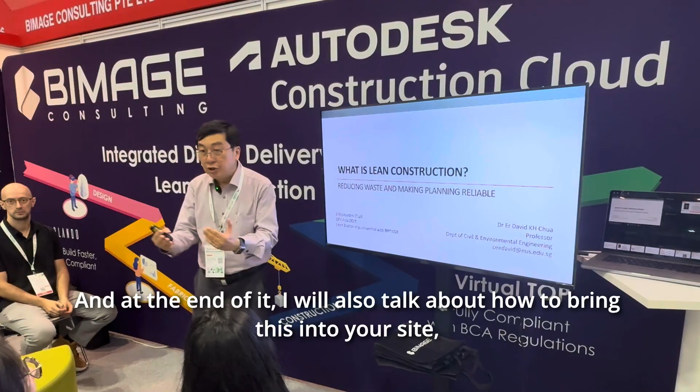Okay, now I'm going to talk to you about lean construction. And at the end of it, I'll also talk about how to bring this into your site, how to implement true lean construction. Okay, the idea is reducing waste and making your plan reliable.

Now, these are all my research. Actually, I've been doing lean construction, started in the 80s, came back in '89 for my PhD, and then did a sabbatical in '97, and since then I've been doing lean. That's when it was born in America, around that time. So I've been doing that, and this software was actually developed some years back. Then I worked on artificial intelligence and all. Lately, I'm working on construction automation. So later, if those are interested, we can talk about what construction automation we have done.

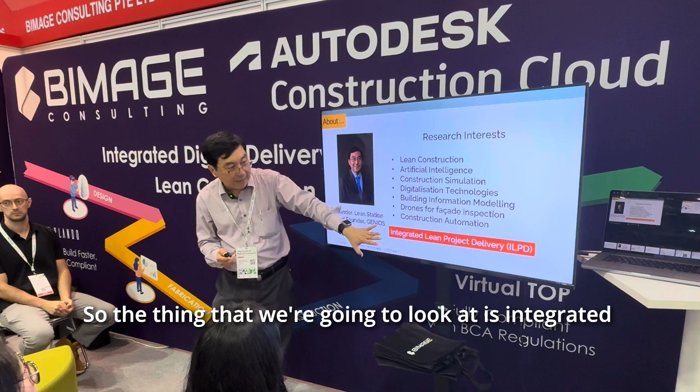Okay, so the thing we're going to look at is integrated lean project delivery. So now we're going to go through why go lean, then some lean methodology, and then we're going to look at implementing lean in projects. Okay, and looking at an overview of Lean PlanDo, that's the software that we have, and managing this change, managing the change in the company to adopt this new mindset.

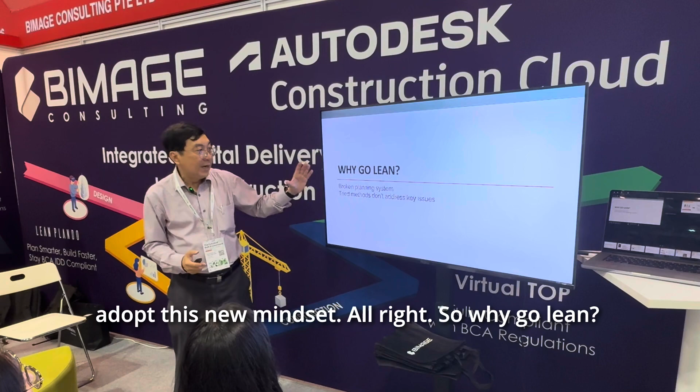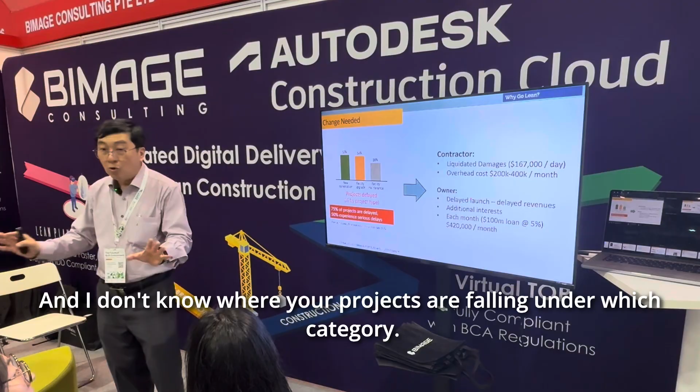All right, so why go lean? One of the things is that we know projects are typically delayed. And if you look at the data, 75% of projects are delayed. 50% experience serious delays. I don't know where your projects fall under which category, but typically this is the situation.

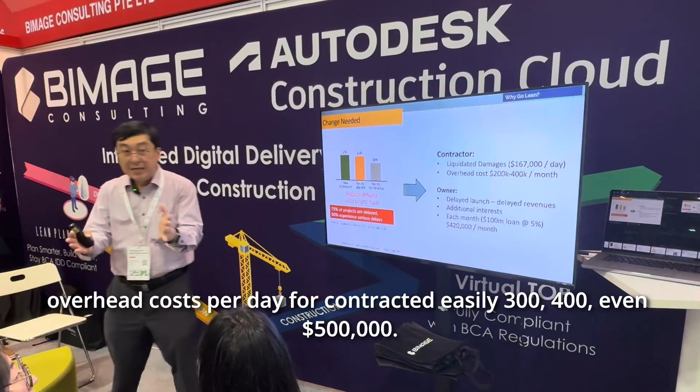And I want to just say that LD is pretty high. I've handled one which is $167,000 a day. So in the end, actually they would have gotten the building free if they had negotiated, but they settled with an outcome. Then the overhead costs per month for a contractor are easily $300,000, $400,000, even $500,000. So now if you have a methodology that can pull back a month or two months even, you're going to save $1 million easily. So this is where I'm proposing the value to you all.

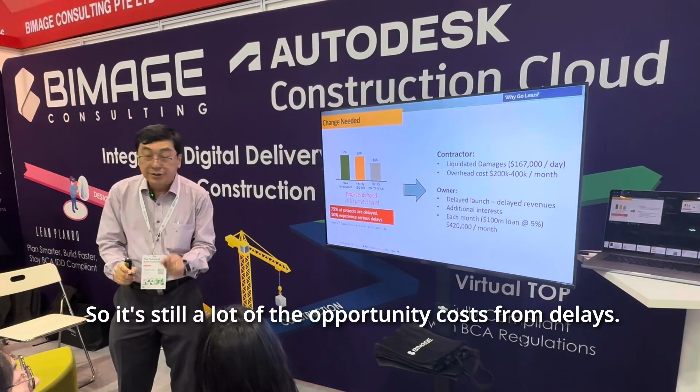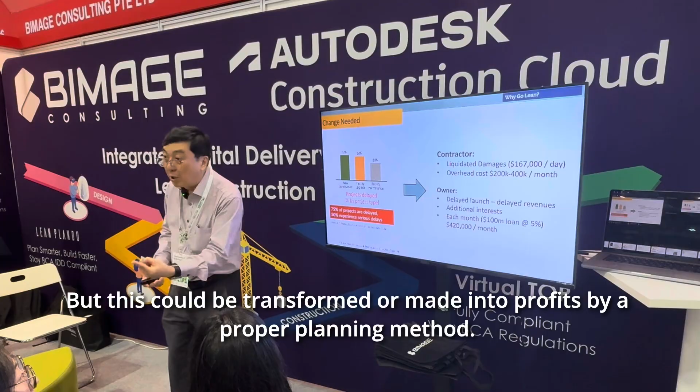The other thing is that even from the owner's side, each month, if it's a $100 million loan at 5%, it will be $420,000 a month if there's a delay. So it's still a lot of opportunity cost from delays. That's why a good, reliable planning method is important to bring back value to the project. So all the fat that you put in, you've actually budgeted it, but this could be transformed into profits by a proper planning method.

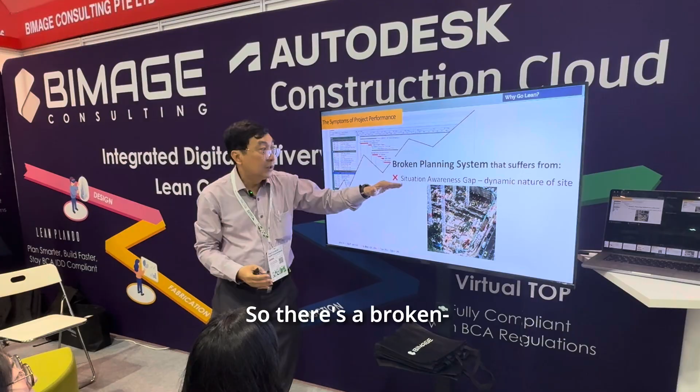So it's worthwhile to invest in a lean project delivery system. What we have actually is a broken planning system right now, the state of the art in the industry. What do I mean by that? First, it's a situation awareness gap. What is on the plan, on the site, on the chart, doesn't reflect what is actually on the ground. So this is a situation awareness gap because of the dynamic nature of the site.

So what we need is collaboration and visibility. And this is where we need a software, a system, a platform to be able to provide this collaboration of different stakeholders and visibility. Second is what I call a realism gap.

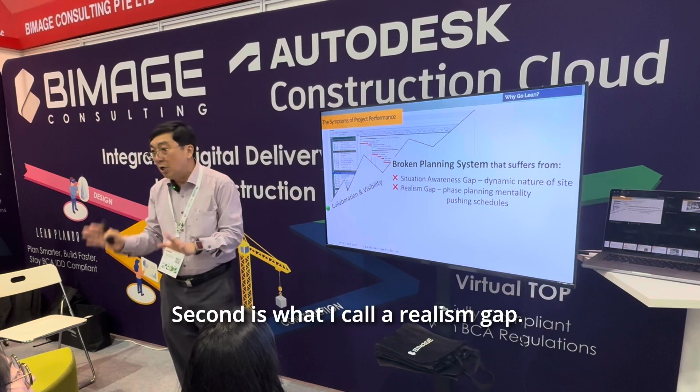There is what we call a phase planning mentality. We have a plan, we should do this, and we push this schedule. So we have a push schedule mentality.

So I'm going to show you a video. Lucille Ball, who knows Lucille Ball? This is Lucille Ball. You're too young. I'm 68, so those days I watched this. Okay, so anyway, watch this.

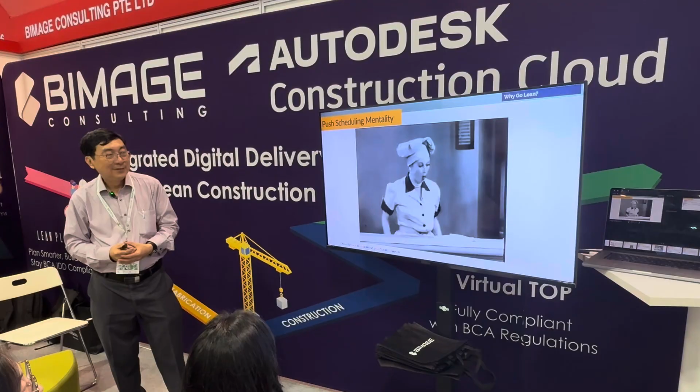I hope you all understand the idea. When we push a schedule, not knowing the capacity of the downstream, this is what we're going to get, a disarrayed schedule. Plans are all in disarray. And the other thing is that we don't have feedback. They cover all the tracks, okay? So push, you will get this.

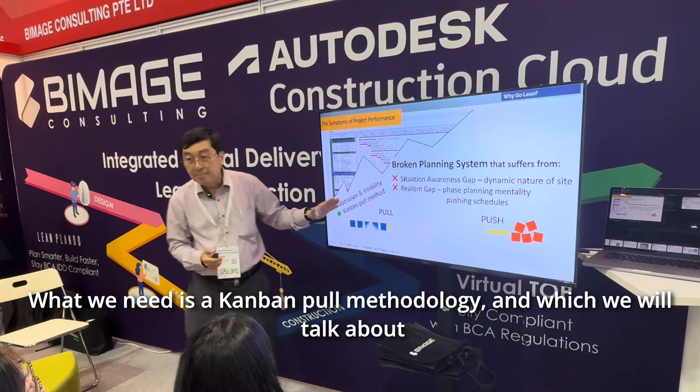What we need is a Kanban pull methodology, which we will talk about in the lean construction method. We have a pull mechanism that will bring about reliable planning for the site. The other one we have is bottlenecks. This bottleneck is because of flow variability.

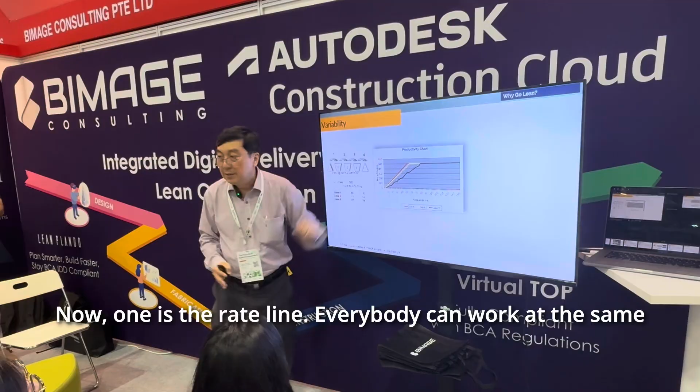Now, what do I mean by that? So I came up with this example. Just passing bins from buffer to buffer of different workers. Now, one is the rate line. Everybody can work at the same uniform rate all the time. This one has more variability, and this is the worst variability.

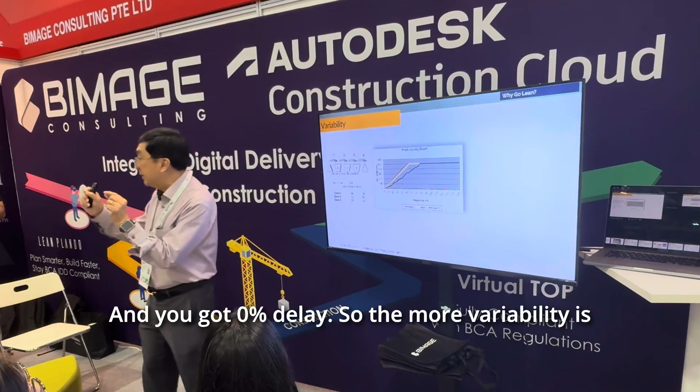So what will happen is that you can see that performance with the worst one is 54% delay, right? Without any variability, everybody moves smoothly like manufacturing, and you got 0% delay. So the more variability is in the system, the more the delays. And that's why your crane operation always has a bottleneck, because of variability in the demand for the supply. So that's a very important queuing problem mathematically.

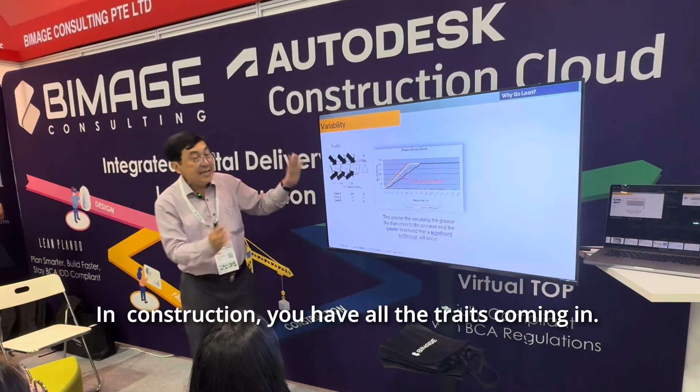So now, when this variability increases, you have a significant bottleneck. That was only one trade. In construction, you have all the trades coming in. Everyone has variability. This will grow and compound. So that's where the problem is. Can we bring in the idea, can we invest in reliable planning so that you have reliable, smooth production like a factory? This is where we want to go, all right?

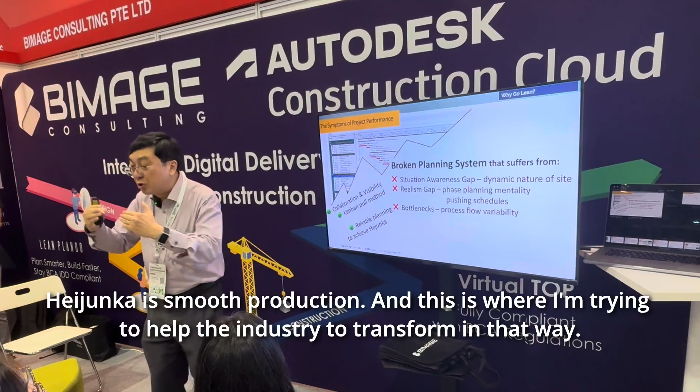So, with reliable planning, we can achieve Heijunka. Heijunka is smooth production. And this is where I'm trying to help the industry to transform in that way. Okay? What are these numbers? Just nice. These numbers are beautiful.

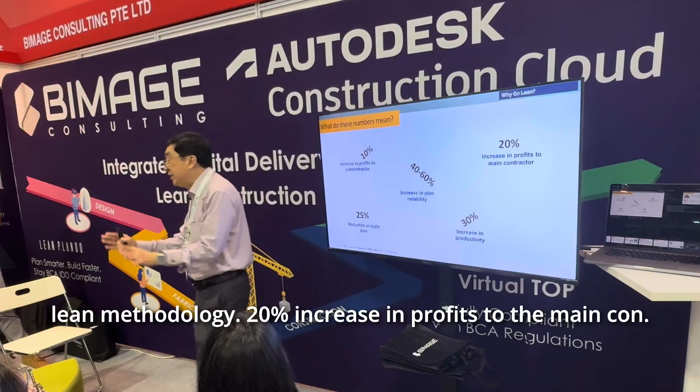10% increase in profits to your subcontractors if you adopt lean methodology. 20% increase in profits to the main con. We have 30% increase in productivity. We have 25% reduction in cycle time. We have increased plan reliability, 40 to 60%. Some of these numbers we experienced, some of these numbers are from research.

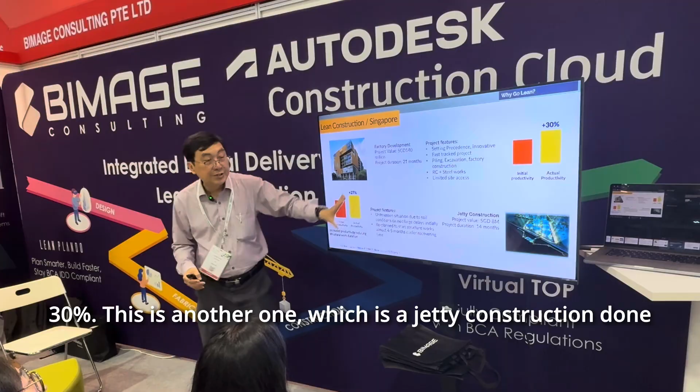Now, this is a project that we had. Actual productivity went up 30%. This is another one, which is a jetty construction done in the beginning years, 27% increase in actual productivity. So it is possible. What does the World Economic Forum say?

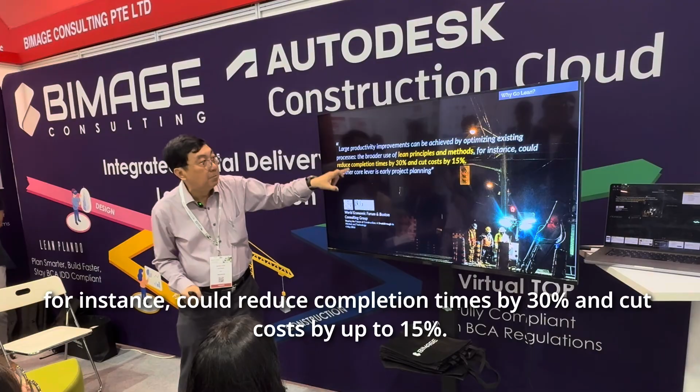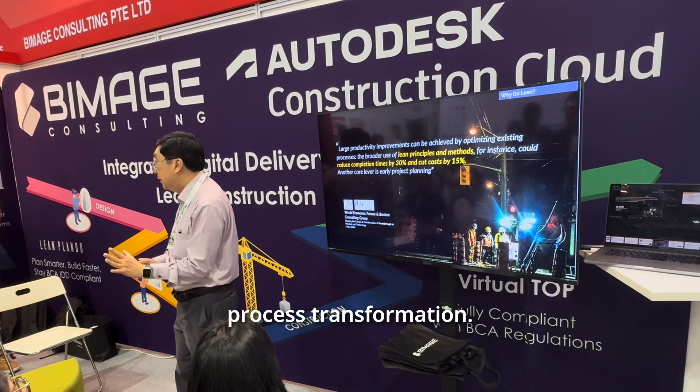And this is done by, if I'm not mistaken, BCG, and it says this: large productivity improvements can be achieved by optimizing existing processes, the broader use of lean principles and methods. For instance, could reduce completion times by 30% and cut costs by up to 15%. So we are looking at those types of numbers, a dramatic, radical improvement in project performance just by focusing on process transformation. All right? It is not technology, but process transformation.

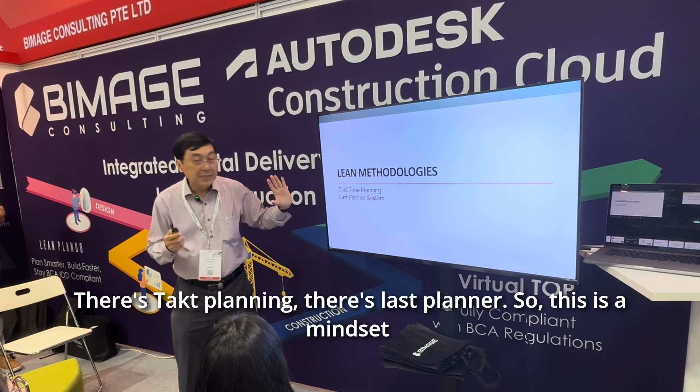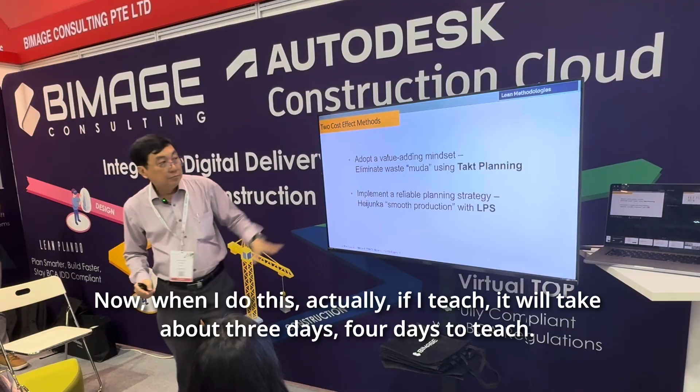So this is a mindset that will add value called takt planning, which I'm not going to focus on, all right? I want to focus on this other one, which is the last planner system, which will bring about what I call Heijunka, smooth production. Now, actually, if I teach this, it would take about 3 days, 4 days to teach. So I just want to go through this very quickly, the LPS system. How do we deliver that in our platform?

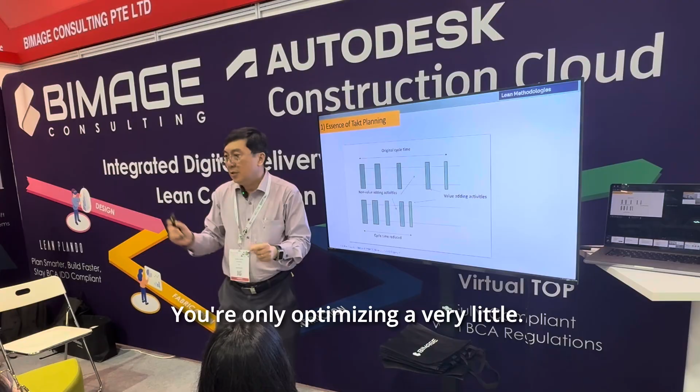So, okay, just an essence of takt planning. If these are what we call non-value adding, and these are value adding, the way to address the reduction of cycle time is not to focus on this. You're only optimizing a very little. But if we reduce the non-value add, you bring a lot of change in cycle time. I'll give you an example, lifting.

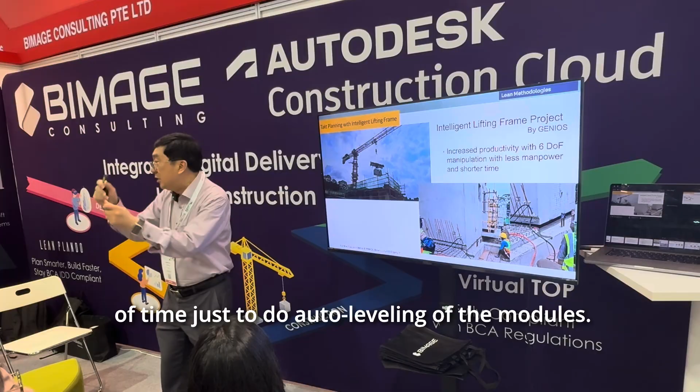I have a technology now called Intelligent Lifting Frame by Genios. Okay, I'm the CEO of Genios, and we can increase productivity because we have 6 degrees of freedom on that frame. It auto levels and so on. So just first cut, we save 20 minutes of time just on auto leveling of the modules, because we don't use chain block. We use technology, we got auto level.

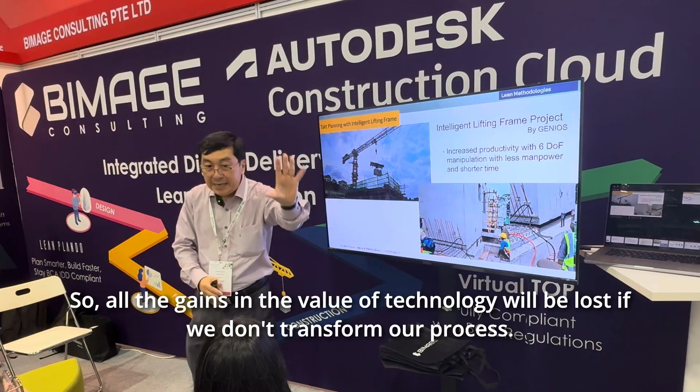With all these advances that we have, if we still have to wait for the arrival, we can waste 20 minutes, half an hour, just like that. So all the gains in the value of technology will be lost if we don't transform our process. So this is why takt planning is to be able to reduce these losses in waste. All right? Now, the essence of the last planner system.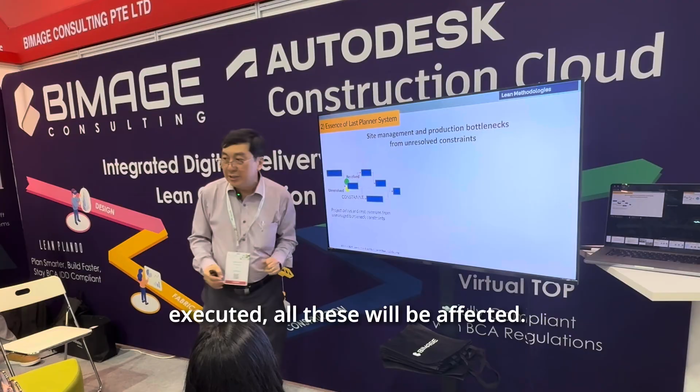If we have a schedule like this, and there are constraints, all right? If I show a green, it's resolved. If I show a yellow, it's unresolved. If this constraint is unresolved, this activity cannot be executed, and all these will be affected. And that's where you begin to have disarray in your schedule, in your plan. So the way to do it is manage the constraints.

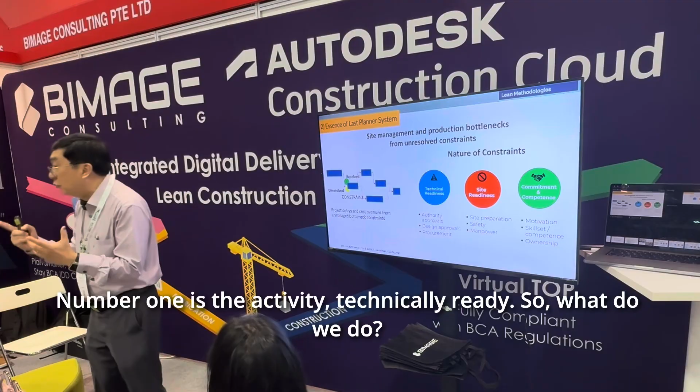So what we're going to do is, there are 3 types of things that we try to capture in our system to give you the underlying reason to your project performance. Number 1, is the activity technically ready? We have to track all the authority approvals, design approvals, procurement, and many others that talk about the technical readiness of your activity. Second, we talk about site readiness. And that's where we talk about safety, site preparation, manpower, and any other things that we want to monitor here.

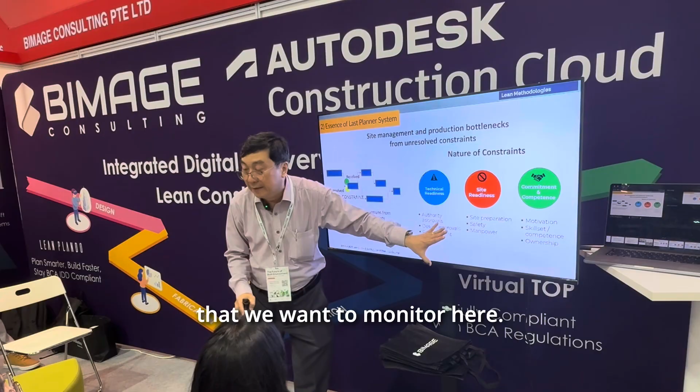Now, the last one is your motivation, commitment. That one can fall, because if you have this plan and they still can't perform, even though these 2 have been satisfied, because they lack commitment, that's where you will fall. So we have 3 ways of measuring what is happening on your site. And now, how does this fit into the whole planning system of LPS? So we need to resolve all this, all right?

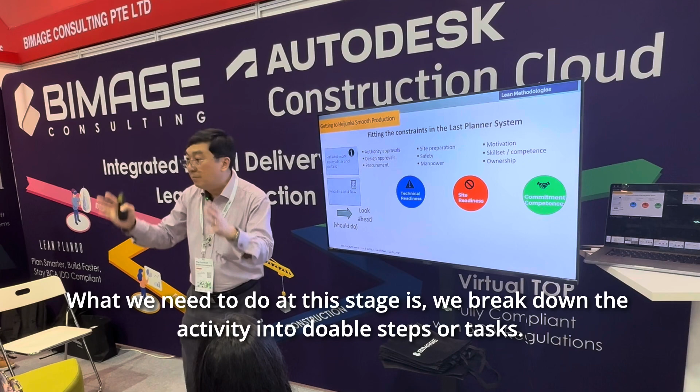So what we have is this, fitting the constraints in the Last Planner System. In our method and our platform, this is the look ahead. This is your original plan. What we need to do at this stage is we break down the activity into doable steps or tasks. Break down the activity so we can measure bite size. This is what we call should do. We should do this, but we have to make sure that it is technically ready. Then we will have what we call a shielded plan. This plan can be done, technically ready to do.

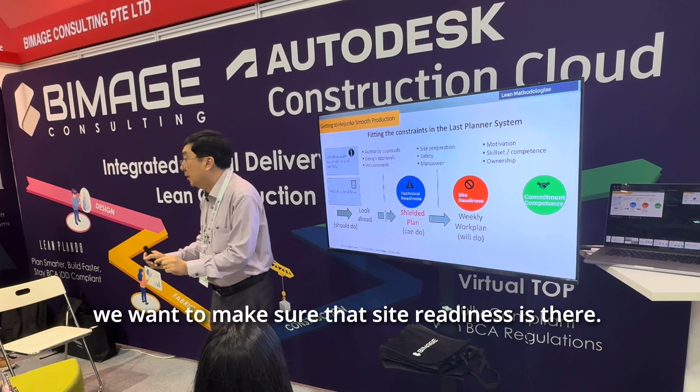Then we make sure in the next stage, before we let out the work, that site readiness is there. So once we have this, it means we will do this. Then this is given to the site, and this is then what we did. And the performance will go up if this commitment is in place. So what we do now, we want to measure. We get the data analytics to reveal. So we have a should do, and then we have a can do, remember? A will do, because everything is ready. And then finally, what is did?

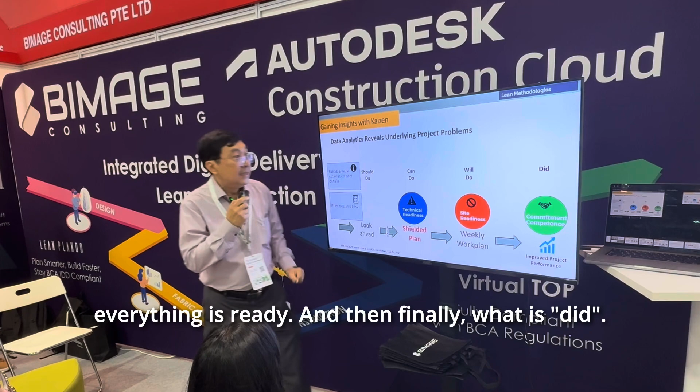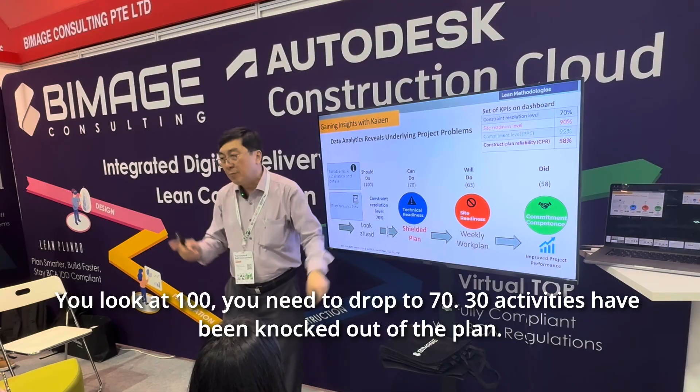Now, if we have 100 here, 70 here, 63 activities done here, 58 done here, we will be able to measure the KPIs of your site. And this is what we have, a constraint resolution level. You look, 100, you need to drop to 70. 30 activities have been knocked out of the plan because they have not been resolved. No one expedited, so they will be unresolved. So even though the site readiness, 63 divided by 70, is 90%, even though the commitment is 92%, the overall performance is only 58%. That's the point.

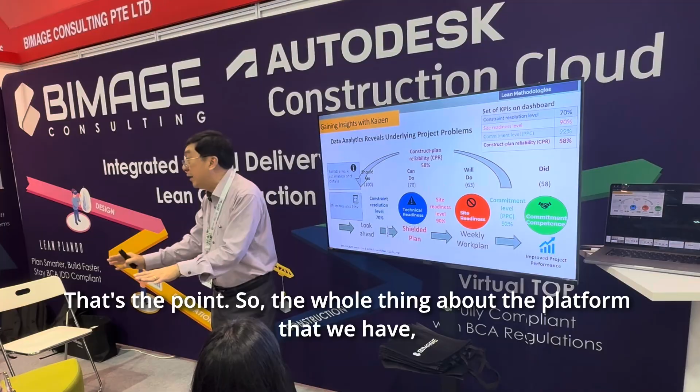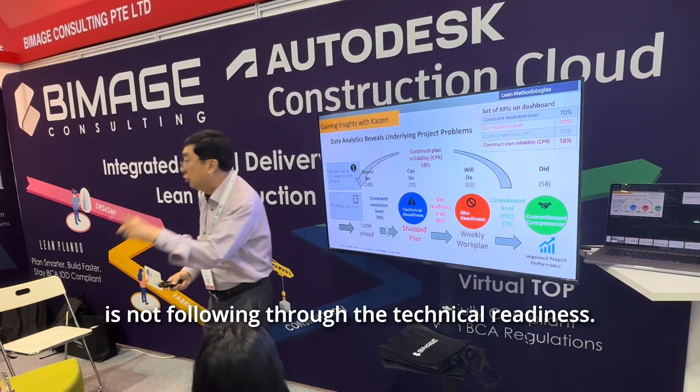So the whole thing about the platform that we have, we can measure where the site is falling behind. Looking at this now, there's no point trying to chase the commitment of the workers. They are there. Your subcon is ready. What is the problem? Technical readiness. It means somebody in your company is not following through the technical readiness. Approvals are not done. Right?

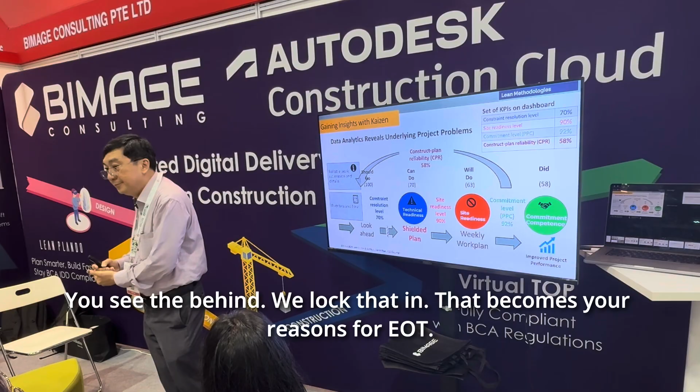So now what we have here is our system is able to pick up who is falling behind. We log that in every week. So if it's constraint readiness, what we do is this: consultant, you have not given us the approval. Because of this, you see the delay, we log that in. That becomes your reasons for EOT. All right, so that's how we do it.

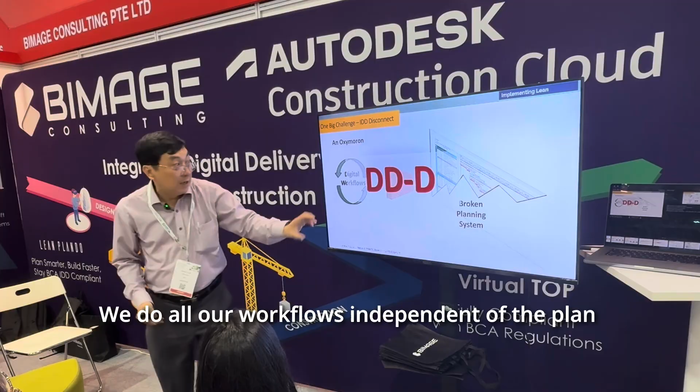Now, how do we implement? I'm going to give you an overview of Lean PlanDo. Now, one big challenge, IDD disconnect. Actually, IDD disconnect is an oxymoron. IDD means what? Integrated Digital Delivery. What do we realize on site? It's DDD. What is that? Your plan is broken, and your digital workflows are not connected. They are siloed. We do all our workflows independent of the plan because they are not linked together. And that's why I call it Digital Delivery Disconnect, DDD.

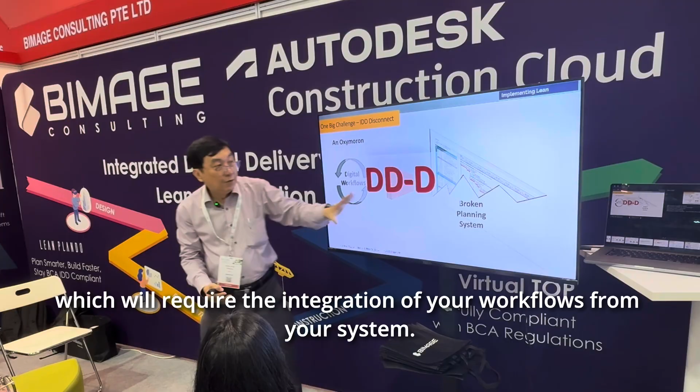What we want to move to is IDD, which will require the integration of your workflows with your system. So if your activity needs to get going, it should generate a workflow automatically. If this is delayed, it should inform your plan automatically. Then you can take the action. They cannot be disconnected.

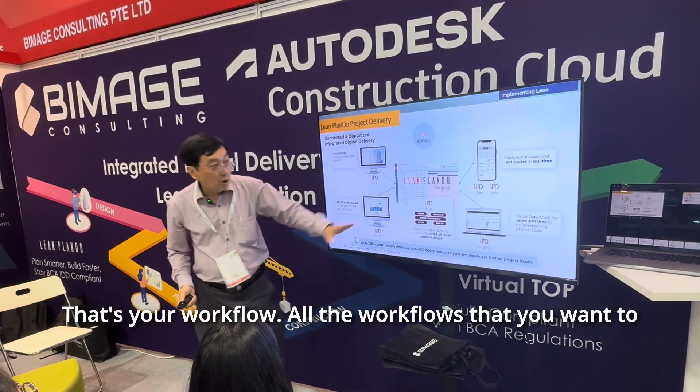So we have this platform. Lean PlanDo project is on the web, or we can use the mobile. We have mobile with the Lean PlanDo flow. That's your workflow. All the workflow that you want to create can be done. It's customizable very easily. You can develop it yourself. We will help you. Then after that, you can customize it further.

Some companies, they charge you arms and legs to make changes. It's all given to you, the ability to make changes that you want. Even a fine change, they charge you arms and legs. You don't want to get ransomed by these people. We allow that. So this is Lean PlanDo with the Lean PlanDo flow.

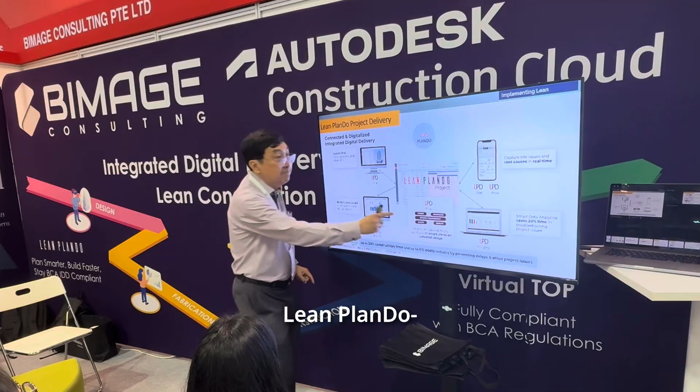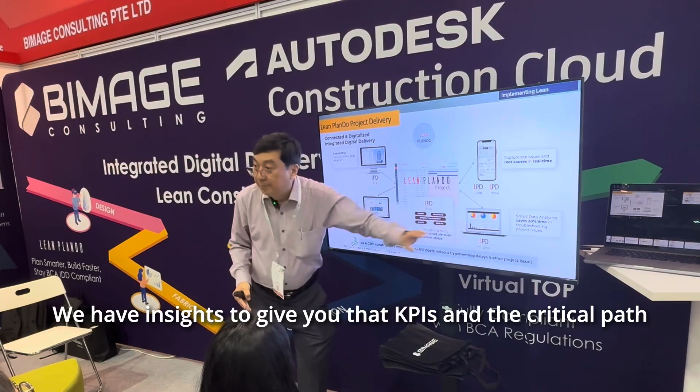Lean PlanDo, so we have all these Lean PlanDo site on your mobile. What is to be done in that week? Every subcontractor can come in and say, I need to do this. They can feedback how much has been done. Then the Lean PlanDo flow tells them what is still outstanding. We have insights. They give you the KPIs and the critical path and all the things that are necessary.

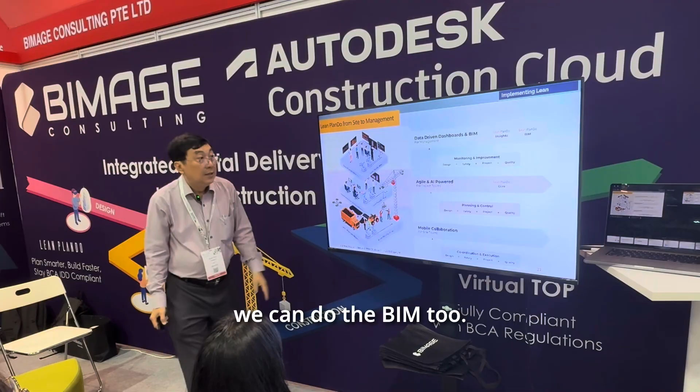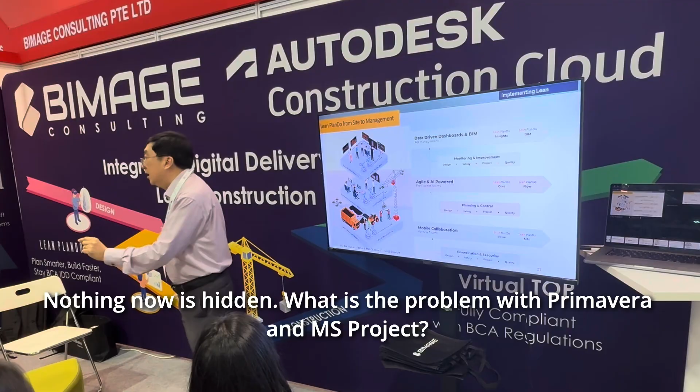So this is the Lean PlanDo from site all the way to management. We have various collaboration platforms to allow you to do that. This is where your project team, site project team, and the management can see it on the dashboard. Nothing now is hidden. What is the problem with Primavera and MS Project? You can change your progress anytime. Even 1 month later, hey, we need to change this.

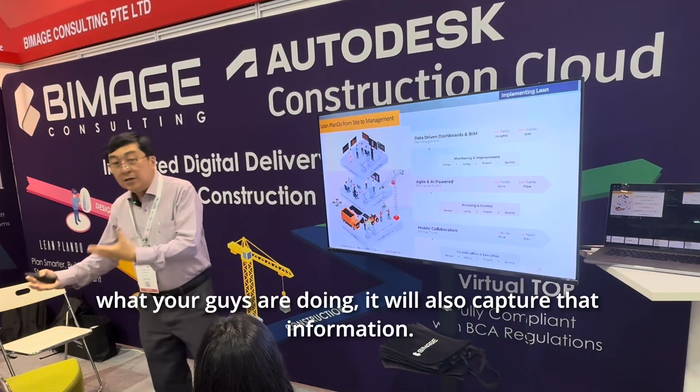They can change it. This is all locked into the system so that if you use this with the owner, you can tell them we'll record everything. Now you can go back and say, this is the EOT. With your staff, if you are the owner of the company, contractor, you want to know what your guys are doing, it will also capture that information, okay?

So this is how the thing looks like. And this is the workflow. For this, I'm doing the DFMA or the PPVC, right? You can capture everywhere in your DFMA cycle, and it will inform what is the potential delay alert up there just now. Okay, it will tell you if there's somebody who is sitting back on the approval.

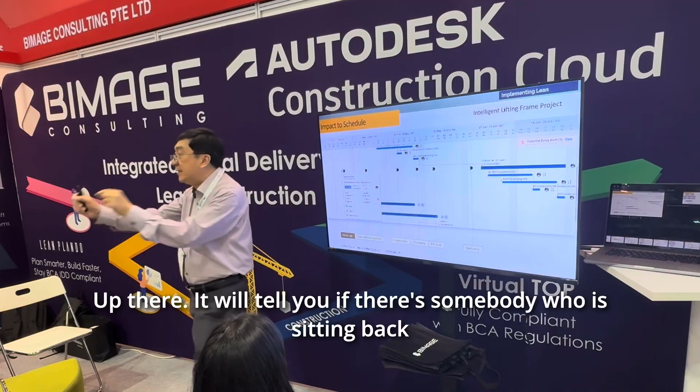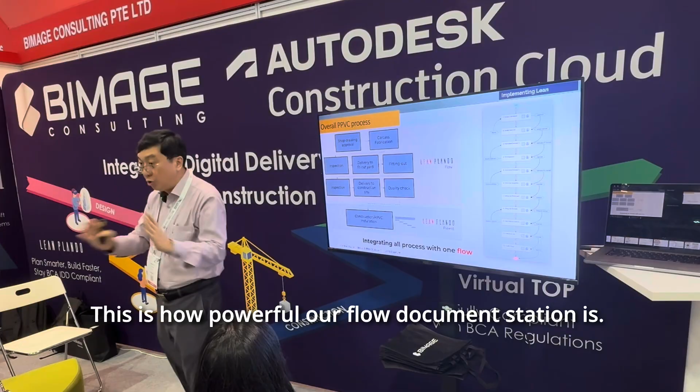So this is the PPVC process, we got it, and it all triggers by one button. After that, all the various forms are linked together. You don't have to take out form after form. It will come in automatically. This is how powerful our flow documentation is. You don't have to trigger one by one. It is automatically triggered. So even if you have other processes that need that triggering by itself, you can actually make it happen.

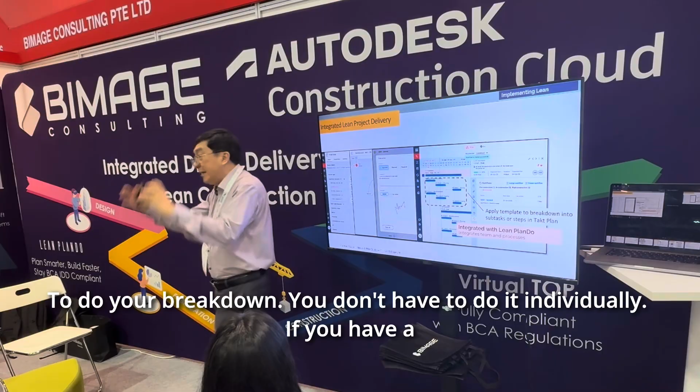So these are the forms. You can customize. That's where the signing and everything you can do, right? You can apply a template to do your breakdown. You don't have to do it individually. If you have a pattern, just bring it in. It will distribute the activities according to the amount of work. That's the template. And then finally, you have the dashboard. So where do we go?

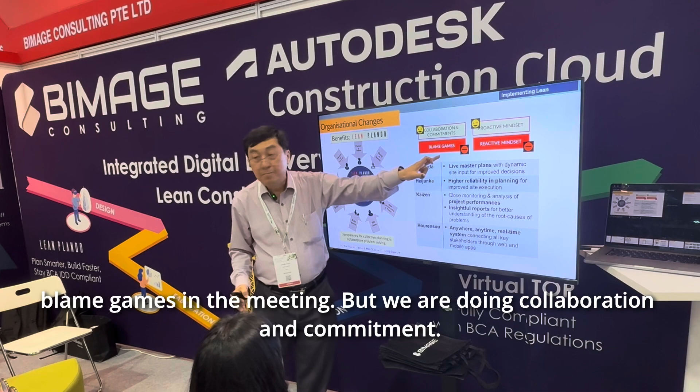There's going to be organizational change. We are no more doing blame games in the meeting, but we are doing collaboration and commitment. We are no more doing reactive mindset because we actively plan through the look ahead and expediting the constraints. So we will have no muda, means no waste, no more waiting. Heijunka, smooth production. Kaizen, because we have the feedback from your KPIs, we will be able to know what is happening on site.

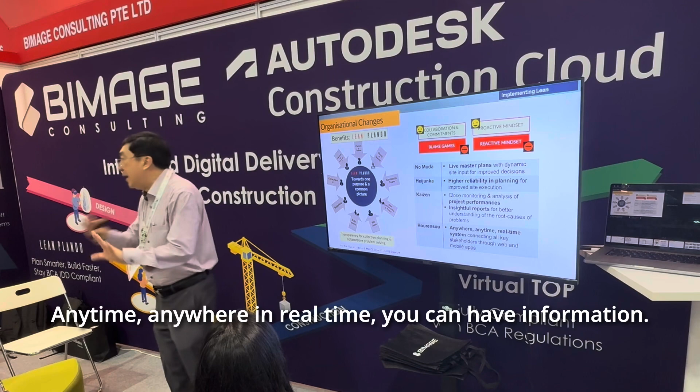And we have Hourensou. What is that? Anytime, anywhere, in real time, you can have information. All right? So we have a transformation of different stakeholders. Everyone will benefit from the use of this. The licensing is unlimited number of users. Okay? So how do we implement change?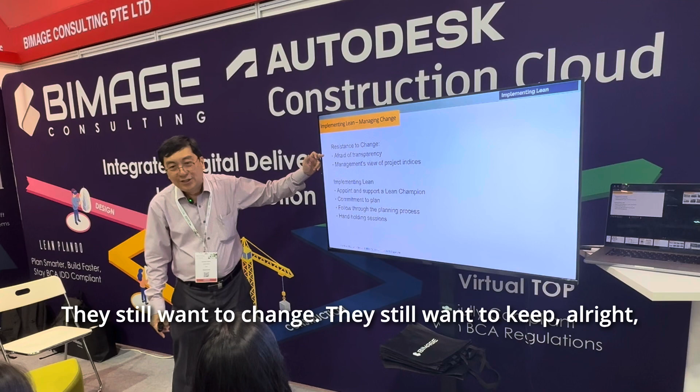Resistance to change because staff, workers are afraid of transparency. I've seen that. They still want to keep, all right? Management's view of project indices: we don't use a punitive method. We use an improvement mindset. It must change from the owner, from the boss of the company. We must look at it that way.

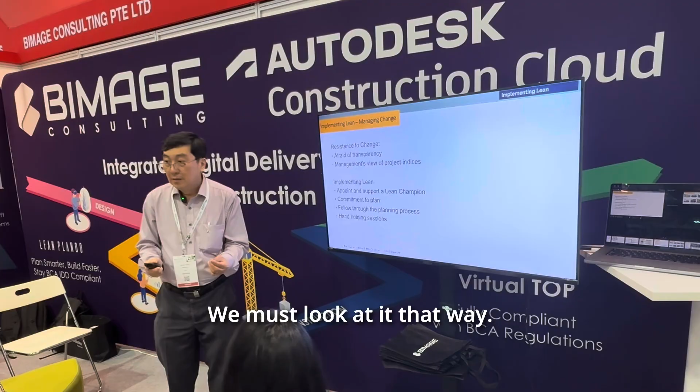More information, more scope for making better decisions, not punitive. You are that, I'm going to sack you, you're finished. Nobody wants to give transparency. So this is a culture change that must be implemented.

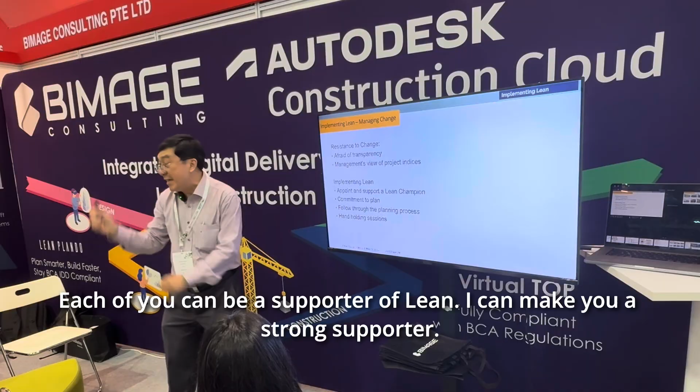How to implement? We have to have a strong supporter. Each of you can be a supporter of Lean. I can make you a strong supporter. I believe in it. When I was there in my sabbatical, 1997, and I love it. Commitment to plan, follow through the planning process, and we will have hand-holding sessions to make sure that you can go on the road.

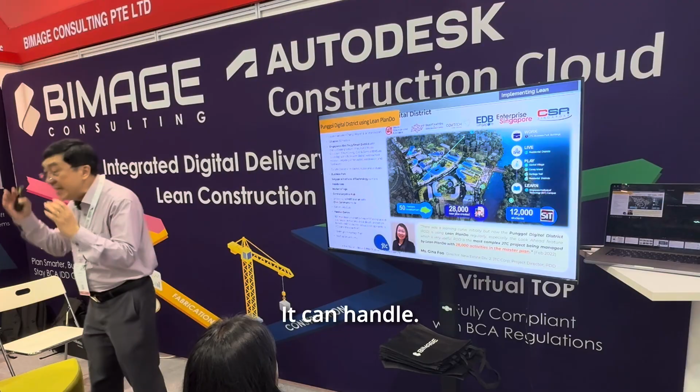These are various projects that we have done, over 90 projects already. And the biggest one was the Punggol digital district there. We have 28,000 activities to handle. It can handle. So what is the problem? The problem is that the industry is running on a broken planning system. Tried methods do not address the key issues. There is an IDD disconnect that results in workflow and project plan silos.

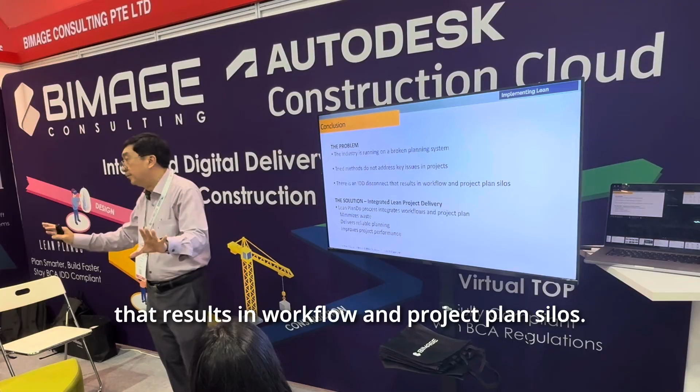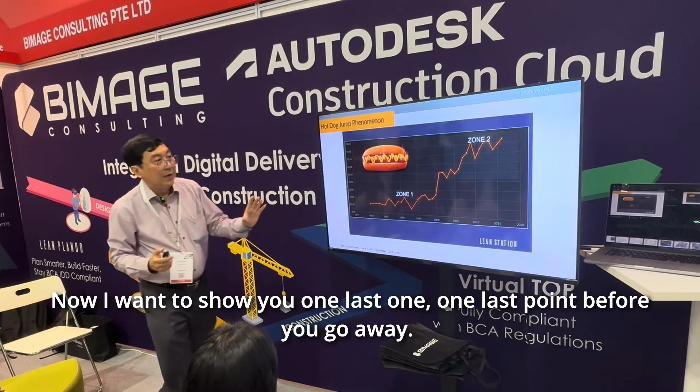Now I want to show you one last point before you go away. I want to show you this competition. This is a hot dog eating competition. The number of hot dogs you can eat in 12 minutes. How many can you eat? One. 12 minutes. 5. Okay. All right.

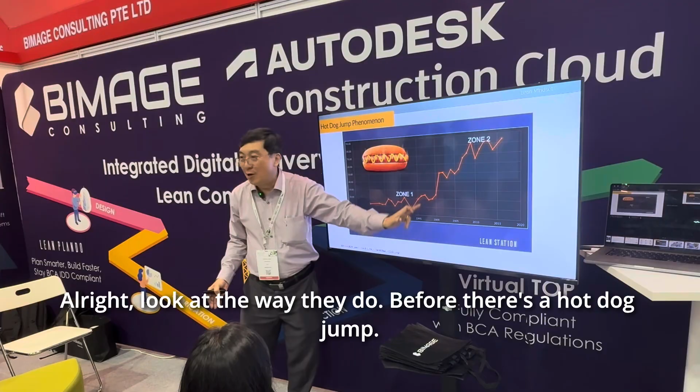Look at the way they do. Before there's a hot dog jump, this was the number, 20. 20 is the average of the winner. 5 times more than you, 4 times more than you. But after the hot dog jump, it can go up to 50 and above. There is a transformation. Why? And this is the transformation I want you to bear in mind.

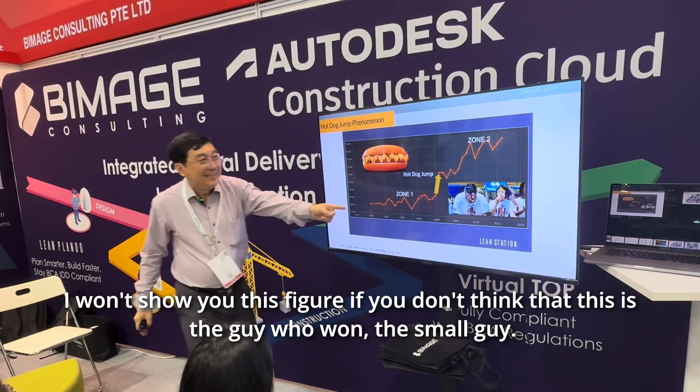How? Who won? I won't show you this figure if you don't think that this is the guy who won, the small guy. It's not a big guy. So it's not a big guy who can do well. It's a small guy because he has a method change. And this is what happens. Oops. Can you louder? Okay, come on, you can hear.

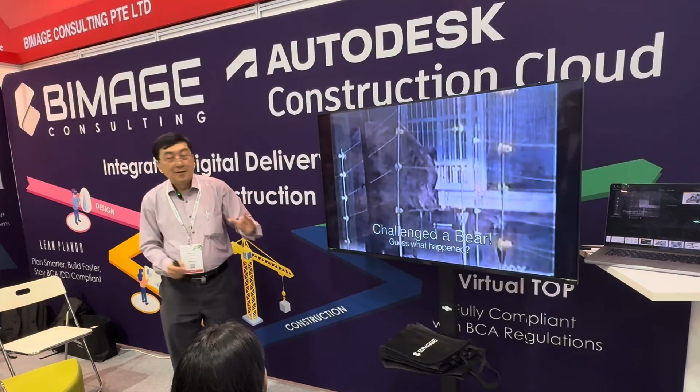Like a conveyor belt. What does he do? He separates, breaks, dunks, eats, and shakes. Okay. He changed the method of eating. This is just to show you that he cannot beat the beast. Because he's not a beast. He's a human being. He can't beat him. Right? So he lost. So he's still a human. It's fine. The companies are human.

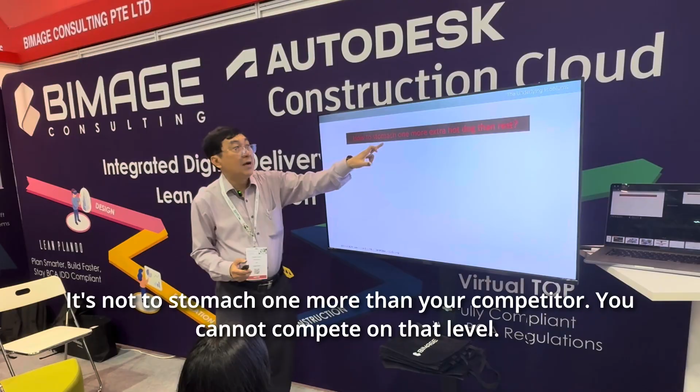The point is conveyor belt. Change the way we eat. All right? It's not to stomach one more than your competitor. You cannot compete on that level. You will be cutting throats. You're cutting prices. It doesn't work. So the way to do it is, don't do it from this point. Have a lean thinking. How to eat one hot dog faster from the way of doing that activity itself. So the same is the way that you're going to start your planning.

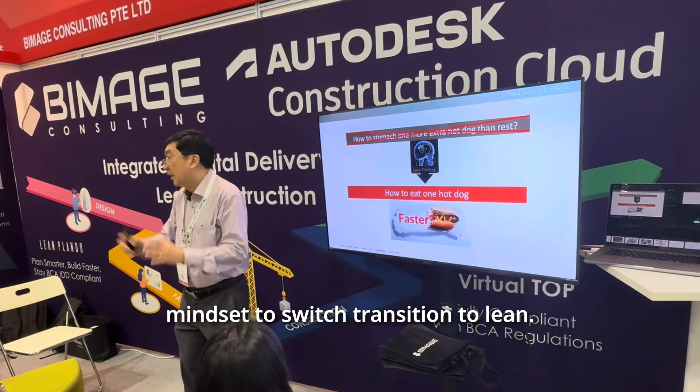Now, I showed the last video because a small guy can beat a big guy. You want to be more competitive? It's the change in your mindset to switch, transition to lean. So this is where I want to offer you the idea of Lean Plando that integrates both workflow and planning. And it actually reveals the problems and you manage it by having a reliable plan. So that's the end. I hope you understand.